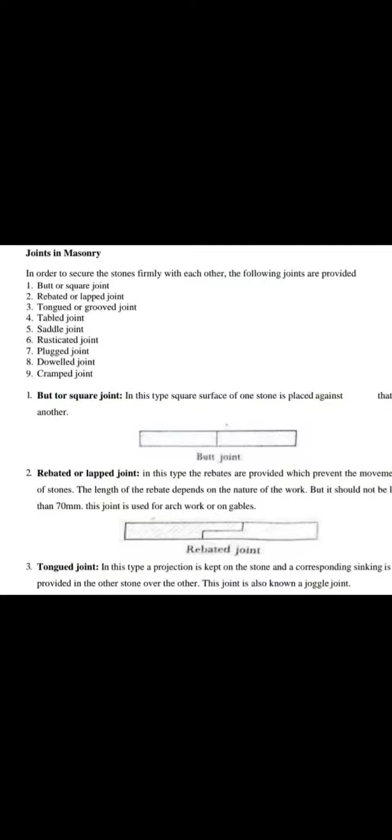Joints in masonry. In order to secure the stones firmly with each other, the following joints are provided. First, butt or square joint. Second, rebated or lapped joint. Third, tongued or grooved joint. Fourth, table joint. Fifth, saddle joint.

Sixth is rusticated joint. Seventh is plugged joint. Eighth is dowel joint. Ninth is cramped joint. So you can see the first in the figure, the butt joint. It is also called a square joint. In this type, the surface of one stone is placed against another. You can see in the figure.

Second one is rebated or lap joint. You can see the figure, rebated joint. In this type, rebates are provided which prevent the movement of the stones. The length of the rebate depends on the nature of the work, but it should not be less than 70 mm. This joint is used for arch work or gables.

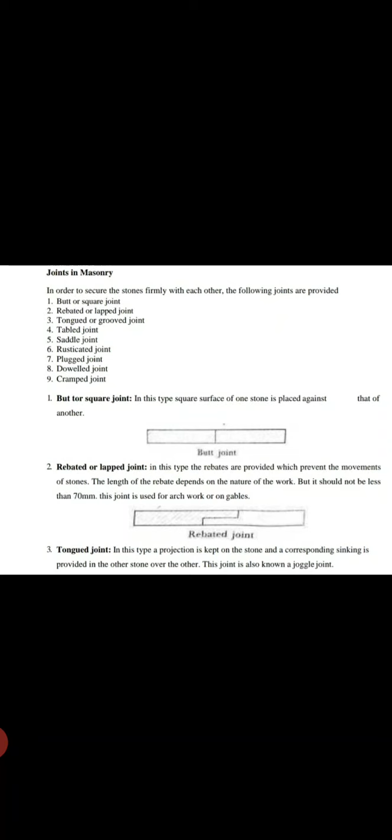Third one is the tongue joint, also called a groove joint. In this type, a projection is kept on the stone, and a corresponding sinking is provided in the other stone. This joint is also known as joggle joint. You can see the figure, joggle joint.

The fourth one is table joint. In this type, a joggle is formed in the bed of the stones to prevent lateral movement. The depth of the projection is about 1/3 of the breadth of the stone. This type of joint is used in structures such as sea walls where the lateral pressure is heavy.

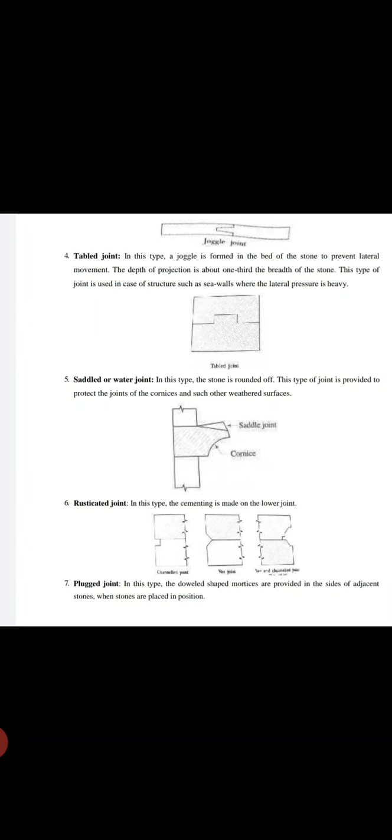The fifth one is saddle or water joint. In this type, the joint is rounded off. This type of joint is provided for the protection of joints of the weathered surfaces. You can see that in the figure.

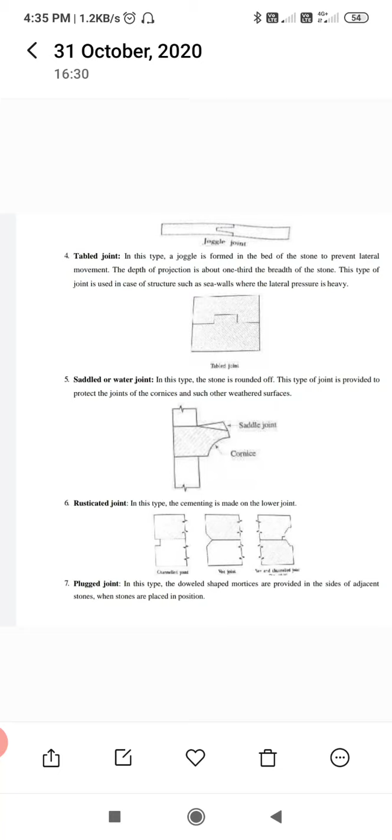The sixth one is rusticated joint. In this type, cementing is made on the lower joints. You can see the figure. Seventh one is plug joint. In this type, dowel-shaped mortises are provided adjacent to the stone placed in position.

You can see the dowel joint. In this type, a hole is cut into each stone, and loose dowels, which are small pieces of hard stone, are generally inserted and fixed with cement. The dowels are generally 25 mm thick and 100 mm to 150 mm long.

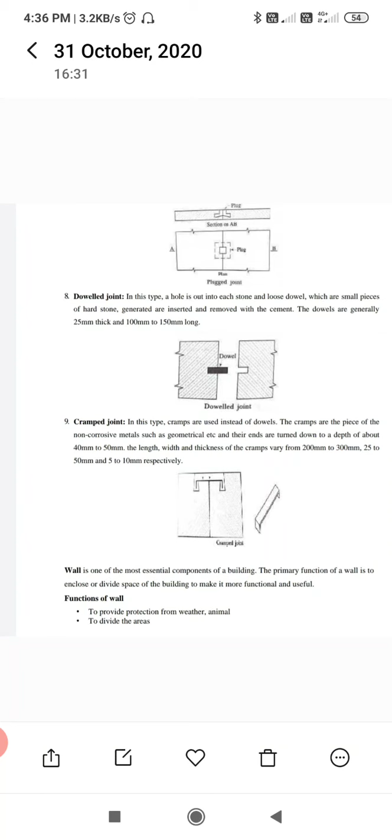Cramped joint. In this type, cramps are used instead of dowels. The cramps are pieces of non-corrosive metal, such as gunmetal etc., and their ends are turned down to a depth of about 40 mm to 50 mm. The length, width and thickness of the cramps vary from 200 to 300, 25 to 50 and 5 to 10 mm respectively.

The wall is one of the most essential components of a building. The primary function of a wall is to enclose or divide the space of the building to make it more functional and useful. The functions of walls are to provide protection from frost, weather, animals, and to divide the area.